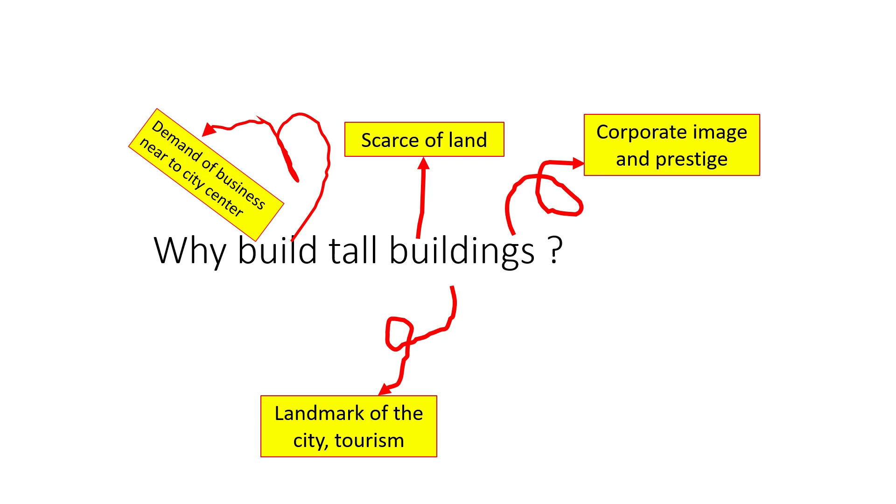And the fourth reason is the landmark of the city. The presence of a tall building can increase tourism attractions, for instance, like Kuala Lumpur City Centre in Malaysia, Burj Khalifa in Dubai, and Taipei 101 in Taiwan.

Since the dawn of history, man has been trying to build the tallest building, tallest tower, or tallest structure in the world. There seems to be much prestige in being home to the world's tallest building, with a large subcategory of towers claiming to be the tallest hotel, tallest office building, or tallest apartment building in the world.

During the first 90 years of the last century, the USA dominated the race for the title of the tallest building in the world, constructing a range of famous buildings. The most famous examples are the Empire State Building in New York City, the World Trade Center in New York City, and Sears Tower in Chicago.

The Empire State Building was completed in 1931, and was the tallest building in the world for 41 years.

The World Trade Center in New York consisted of two towers: One World Trade Center and Two World Trade Center. One World Trade Center was the first to be completed, in 1972, and Two World Trade Center was completed in 1973.

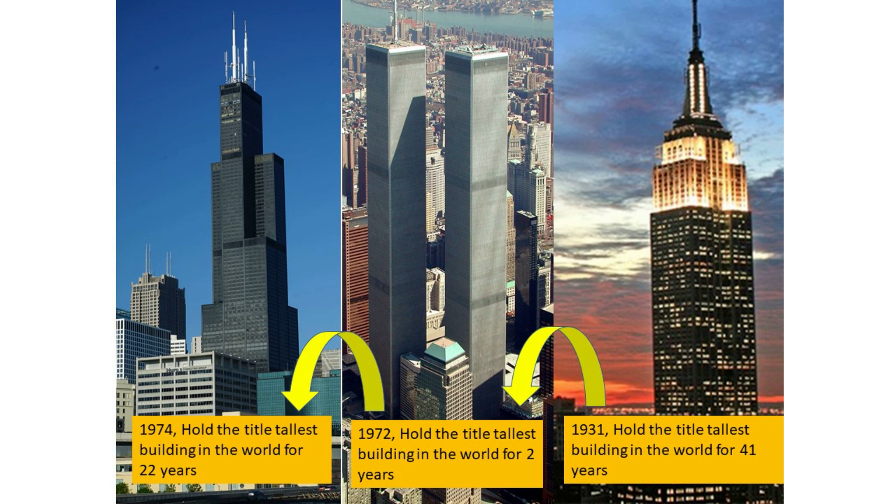After the Sears Tower, which building do you think is the next tallest building? In 1998, the Petronas Twin Towers in Kuala Lumpur, Malaysia, were completed.

From that moment on, a sort of media clash was unleashed. All over the world people debated which one was the tallest building in the world, Sears or Petronas. You see, Petronas achieves its formidable height partly because of its huge spires on top.

Sears Tower, however, has the highest occupied floors. So some people in the press suggested that the Petronas Towers used a trick to obtain the title of the tallest building in the world.

The controversy between Sears Tower and the Petronas Towers went on until 2004. In that year, the Taipei 101 Tower in Taiwan was completed. It is now widely known to be the tallest building in the world.

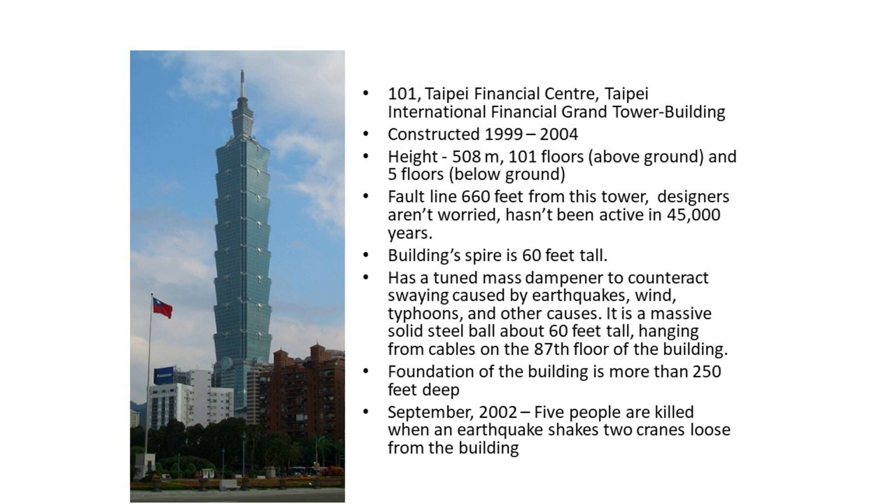Underneath the Taipei 101 Tower, about 660 feet away from the tower, there was a fault line that hadn't been active in 45,000 years. However, in September 2002, 5 people were killed when an earthquake shook 2 cranes loose from the building.

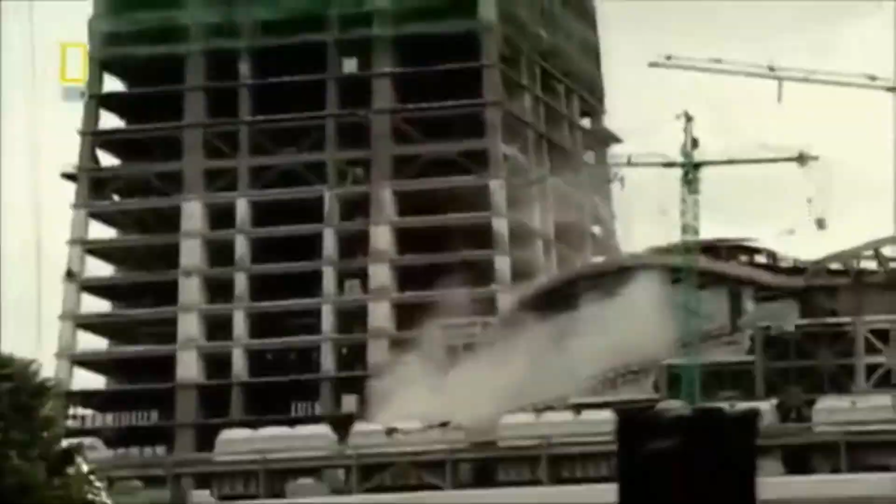Dislodged construction cranes tragically took 5 lives.

Due to the controversy between the Petronas Twin Towers and Sears Tower, the question of what is the tallest building in the world became more complicated than meets the eye. For example, do we take into account spires and antennas?

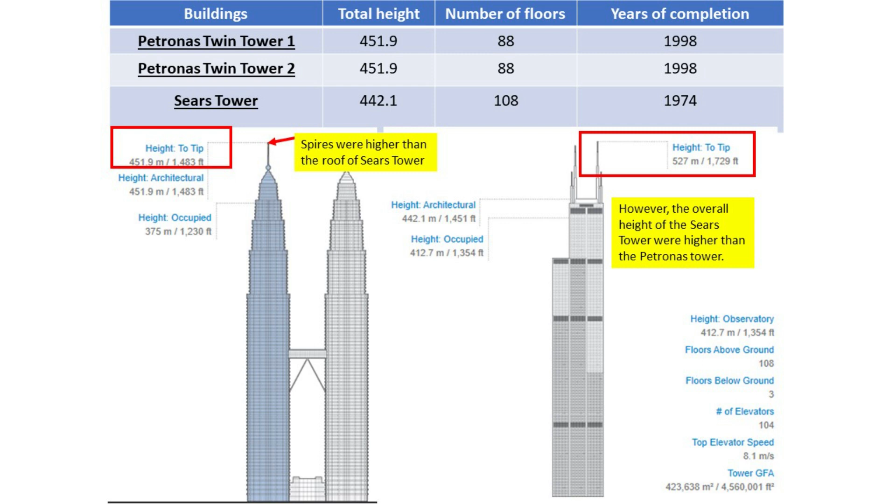As we already know, Petronas Towers claimed the title of tallest building in the world in 1998 due to the spires. The height to the spire's tip for Petronas Twin Tower is 451.9 meters, higher than the height of the roof of Sears Tower, which is 442.1 meters. In fact, if spires were considered when calculating height, the Sears Tower would end up with a total height of 527 meters.

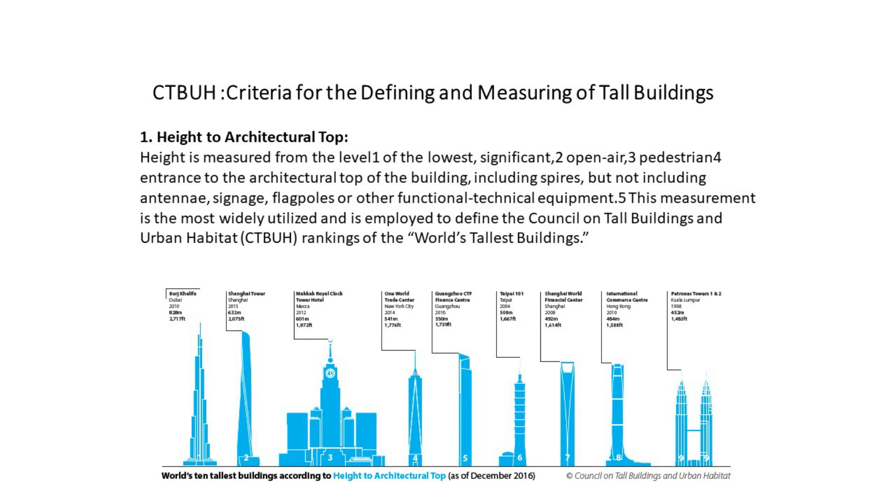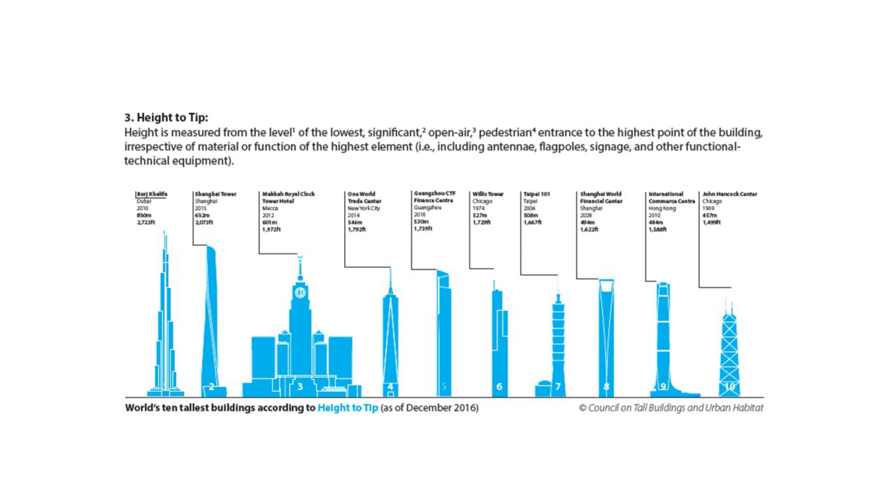Therefore, to end this controversy, the Council on Tall Buildings and Urban Habitat made a compromise. They defined 4 categories for measuring tall buildings: 1. Height to the structural or architectural top. 2. Height to the highest occupied floor. 3. Height to the top of the roof. 4. Height to the top of the antenna.

Do you know that tall buildings are also classified based on their usage? Single function versus mixed use buildings. A single function tall building is defined as one where 85% or more of its total height is dedicated to a single function. A mixed use tall building contains 2 or more functions where each occupies a significant proportion of the tower's total space. Support areas such as car parks and mechanical plant space do not constitute mixed-use functions.

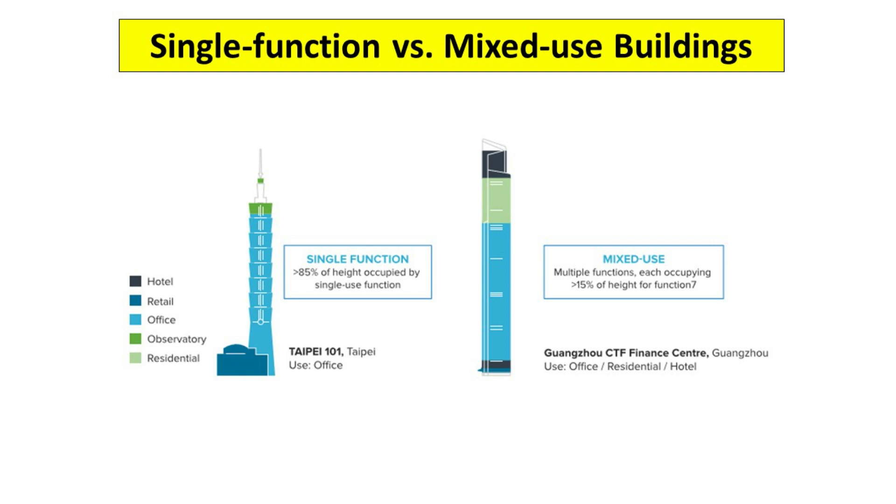And how can you differentiate between a building and a tower? To be considered a building, at least 50% of its height must be occupiable. Telecommunications or observation towers that do not meet the 50% threshold are not eligible for inclusion on CTBUH tallest lists.

Okay class, in the next lecture we will learn about the structural form of tall buildings.